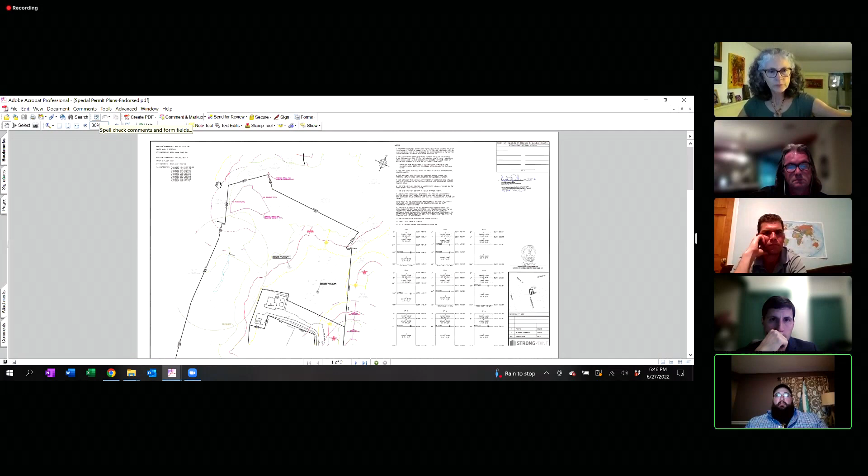Ta-da. So just as a refresher, let me start with this. This is the plan that you endorsed originally, based on the special permit back in September 2021. Here is the existing house at 81 Summer Street. This hatched gray driveway is the existing drive. What we had proposed at the time was to break that driveway here and use it to access these three house lots up in this location. To get access to the existing house, we were going to bring a driveway up through this area.

So what the board encouraged us to do, and what we did do, was go for a variance to eliminate this driveway and allow these three new houses and this fourth existing house to all be accessed off this driveway.

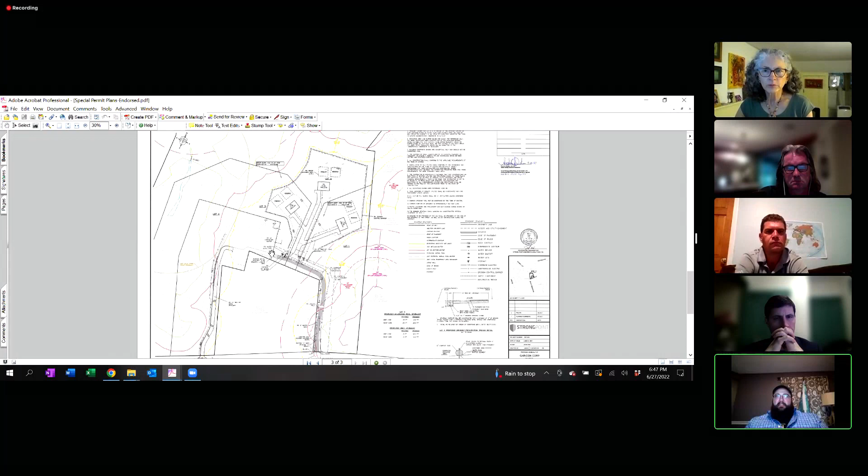So I'll bring that plan up now. That is what ended up being revision 3 to the plans. I'll go to that same sheet for comparison, and what you'll see is the same exact lot configuration. We've gotten rid of the break in the driveway here, and eliminated any semblance of a driveway coming in off the west to access lot 4.

Eric, hang on, let me pause you there for a second. Stephanie, seeing this plan, assuming it has everything we needed, we decided this would just be administrative, that you would just grab it. Do we need to take a vote on this, or not, as I recall?

Any issues? Okay, so motion to approve the final plan, or the post— I'm sorry, it's been a stressful day. You guys have to make the motion, forgive me. Okay, motion to approve the updated plan, reflecting the variance that was granted. That's seconded.

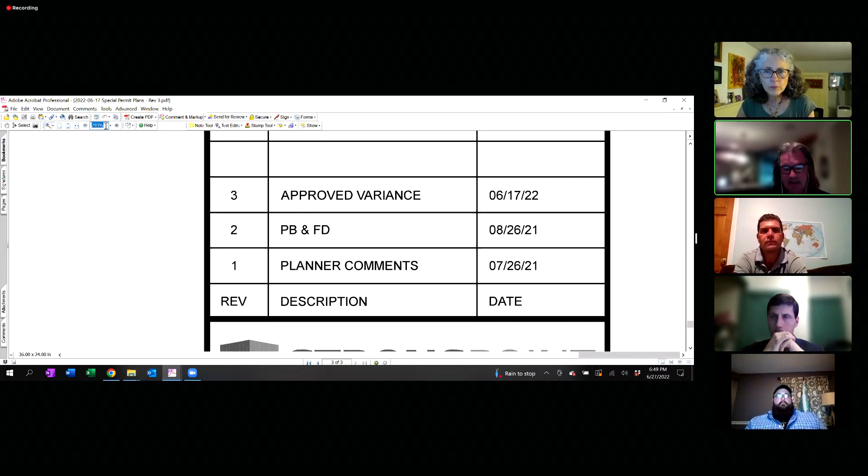Any further discussion? I'm sharing a screen so I can't save it. No chat, nothing. Okay, hearing and seeing none, all those in favor. Shane, aye. Stetson, aye. Balsaric, aye. Great, all right, thank you.

Okay, Eric, so now we haven't seen you for months. We've approved your plan, you got us everything you needed. Now your client wants to change things. Why don't you tell us? Now he wants to change things a little bit, yes.

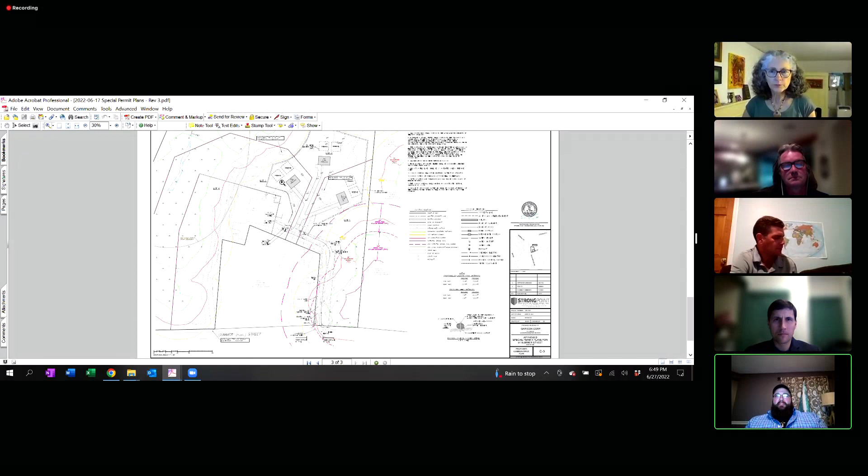So just looking at this plan we just had up, as you can see, these house boxes are a little generic, just a square house box, somewhat of a placeholder, and obviously subject to change once he has a final buyer. Same thing with septic locations. So what we've done since then, a couple of things.

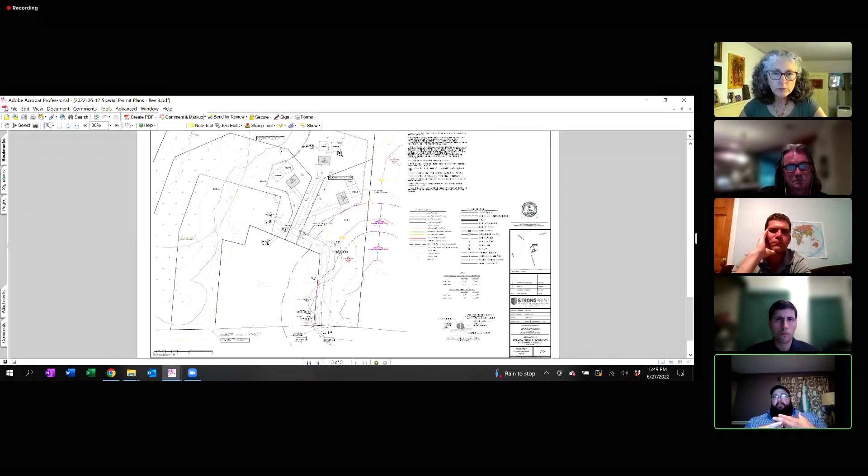He does have a buyer for these lots. We've determined exactly what they want to go with for the house footprints on these lots. We've gone out and redone some test pits, cleaned up our septic plans, and submitted those to the Board of Health as well. So that brings us to this plan.

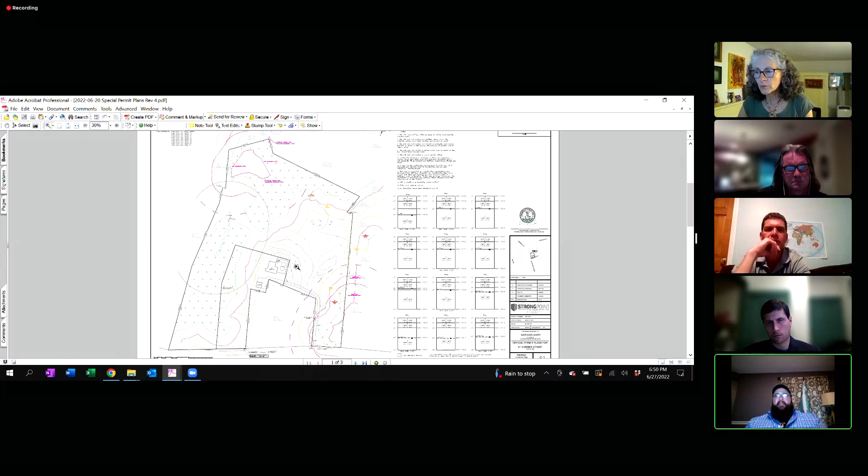This plan is the same plan set we just went through. We've adapted the existing conditions plan to reflect our new test pit locations, here and here. This will eventually, should the board accept these changes, become the basis for an A&R plan. If we zoom in, what's shown as the former lot line on this plan is actually the way the lots are laid out now, with this chamfer at the corners. We're simply revising the lot lines to extend these to square off lot 1 and lot 3 a little bit more.

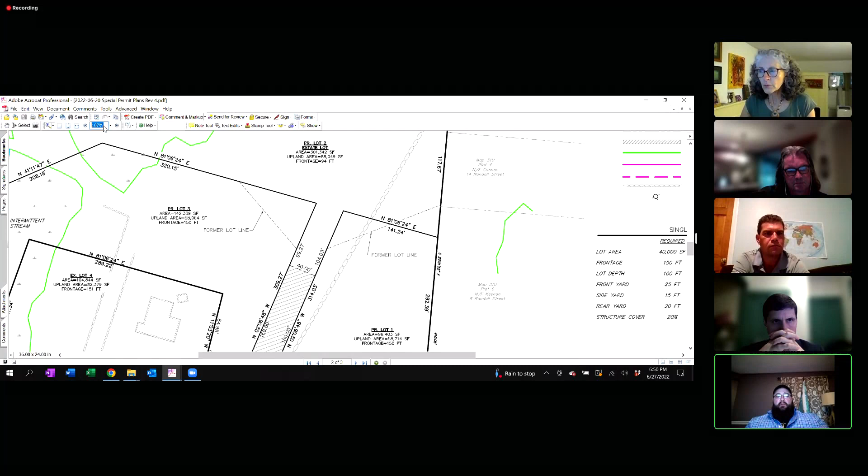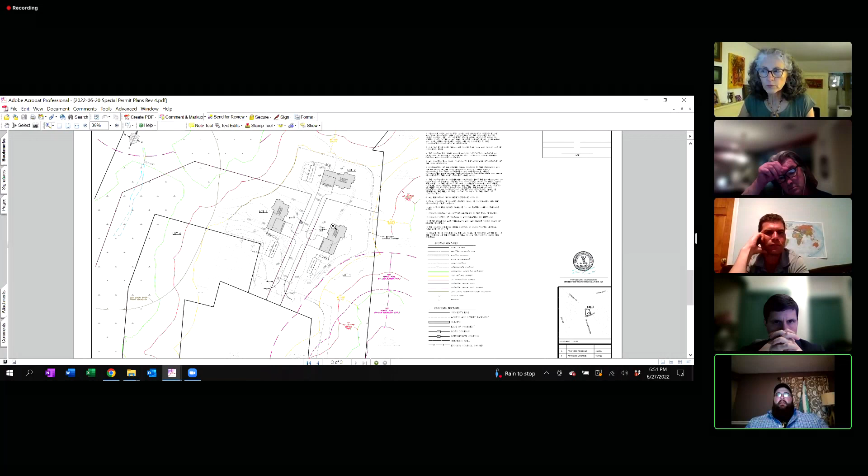Everything is still compliant with zoning. So provided we're successful with this modification tonight, we would presumably be at your next meeting with an A&R plan just to make that change. And with regard to the layout, here is the revised layout the client is seeking. Still 3 houses, still the same general configuration, but the house footprints are more advanced at this point. The septic designs are more advanced and have been submitted to the Board of Health. With these 2 lots, 1 and 3, before they were angled more toward the mouth of the right of the driveway, they face each other now.

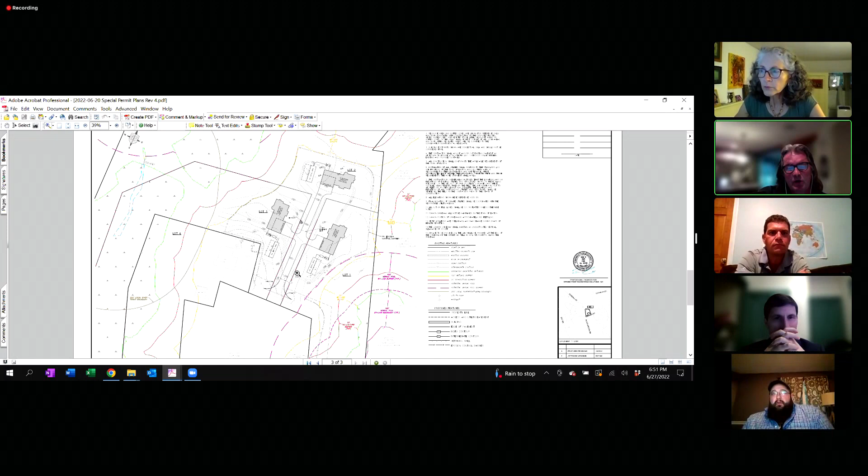Okay, but I know that's not the whole story. Do you want to talk about what else is different in this plan, or do you want me to? In terms of the clearing is what I'm talking about. Well, let's touch base on that. Can we go side by side with the original plan, the approved plan? Do you have that capability? Absolutely can, give me just a second to figure out how to do that.

And we will make it happen. So here's the approved plan.

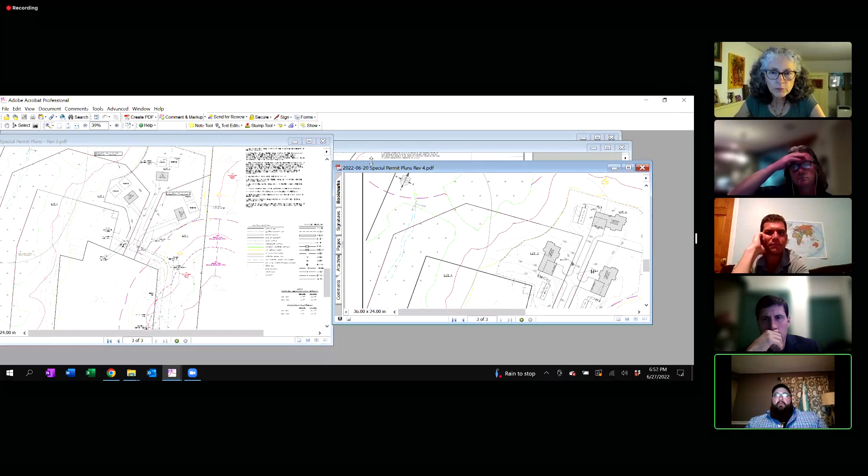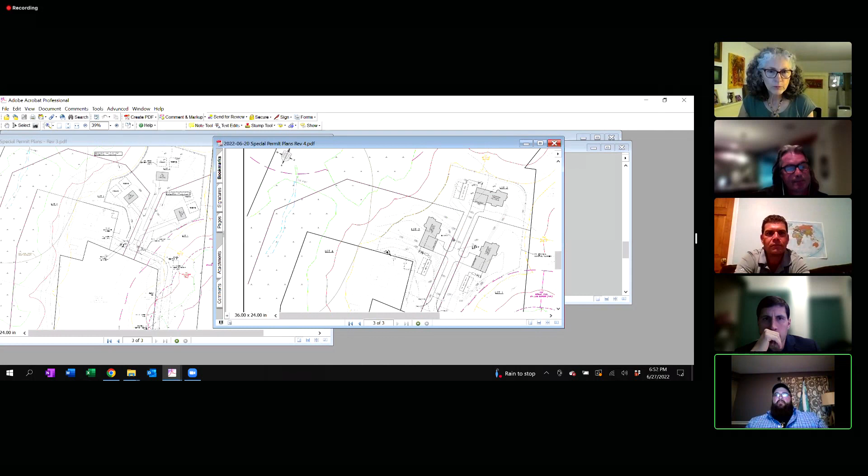Okay, so let's talk about the clearing out there while we do this. The client got to work out there to start clearing the lots to make way for all of this. And the approved limit of clearing is right at the 100-foot buffer zone on every iteration of the plans that we produced. You can see it here.

You can see the EC barrier that comes up through here, right at the 100-foot buffer zone. For whatever reason, and I can't tell you exactly why it happened or what happened, but the tree clearers got a little carried away and cleared in some places into the 100-foot buffer zone, right up to the 50-foot buffer zone. We got a call from conservation from Jen Carlino.

We put the brakes on everything, ran out there to figure out what was going on. I think we got our survey crew out there within the next 24 hours to survey the damage that had been done and determine, yeah, they had in fact cleared into the buffer zone.

We have since been working with the Conservation Commission very closely. We have completed a buffer zone restoration through the area that was cleared and wasn't supposed to be. We are in the process of installing a post and rail fence along the extents of that buffer zone restoration to stop any future homeowners from encroaching further.

And at the meeting tonight, I actually have a conservation meeting on this when we're done here. We are proposing to provide a bond for the restoration work to make sure that any plants that die are able to be replanted and things like that. That to ensure that the site will be monitored as it's supposed to be, et cetera, et cetera, et cetera.

So I think through an arduous, long process, we are getting to a point where the Conservation Commission is, I don't want to say satisfied, but I want to say that we're at least wrapping this up with them the best that we can. Okay, so I just want to jump in for a second.

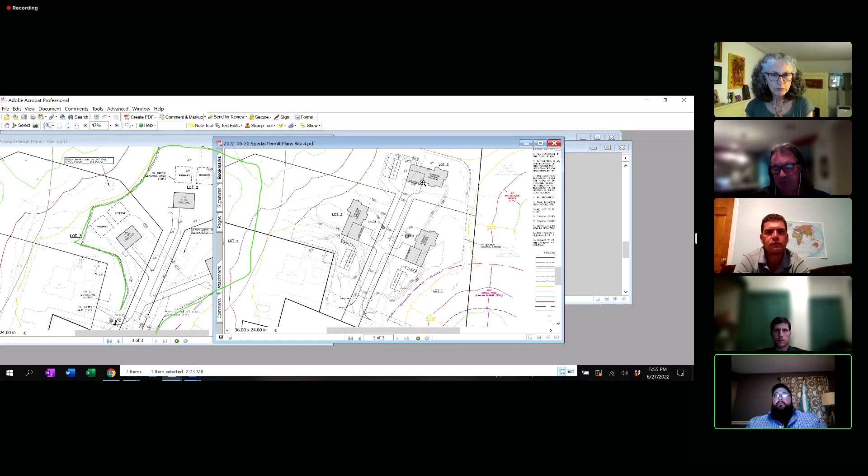So here. I just wanted to bring to the board's attention, you might say, hey, because, okay, when we approve these things, they're all different, but I go back, I think about the bylaws, and this is a special permit. So what was special about this?

Well, okay, in return for this, not having to build the whole road and everything, we're trying to maintain some of Easton's rural character. So we were leaving trees between the existing, if you look to the plan to the left with Eric marked it in green, there's trees between the existing house.

And to the right, and you may say, hey, that's fine, no big deal, none of our business, we're not back there. If it had come in the way it is, maybe we still would have approved it. Maybe we would have asked for a little landscaping. Hey, could you put some trees in here to give some buffer? Because I've heard a few of us say, oh, I hate to have houses right in someone's backyard. Well, mature trees, like there was a nice, mature forest there, can take some of that away.

So I just wanted to bring that up and see if we, as a board, feel that anything needs to be changed from what they've done, or you're okay with what they're proposing. At the meetings, the woman who lived right in front there came to almost every meeting, and she wasn't even against the project. It was more that she was hoping to maintain some privacy.

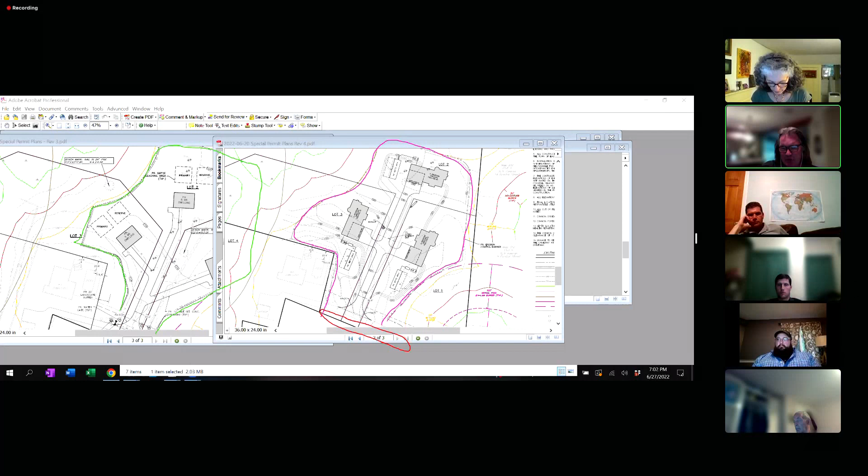Okay, and I see some hands in the air too. We have to check, but I'd rather see you get wrapped up with Concom first anyways, right? And then you add some of the plantings like we talked about in front, and I'd like to see that fence in the plan since it's there. That makes sense, I think, to put that 6-foot fence you talked about. And then see what you can do with footprint locations and mirroring.

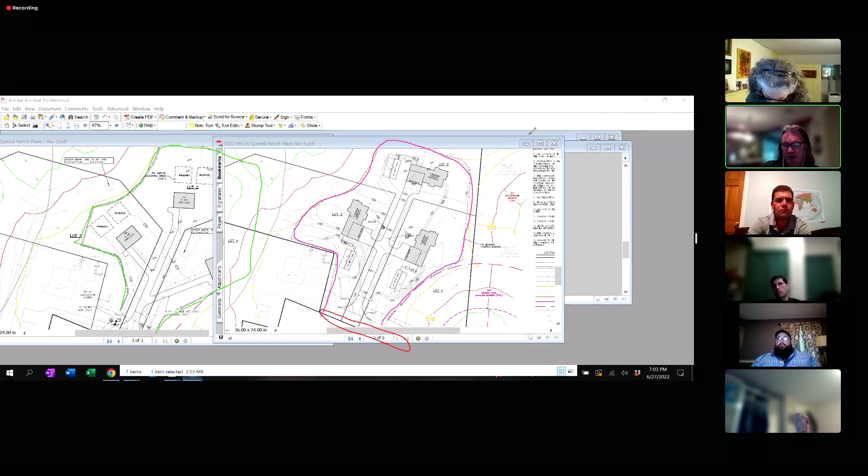Okay, so we don't really need to take a vote on this, right? This is just kind of a discussion. So Eric, you're going to revise this and put on whatever you have with Concom, and then come on back. Are we formally continuing? Can I get on the next meeting, or how do we do that? I think just make it an agenda item, right? Because this would be a modification of a special permit, right? I guess. So okay, we won't vote on it tonight, this is just a discussion tonight. Sure, and then we'll just put them on the next agenda. Correct? Yep, okay, yep, great.

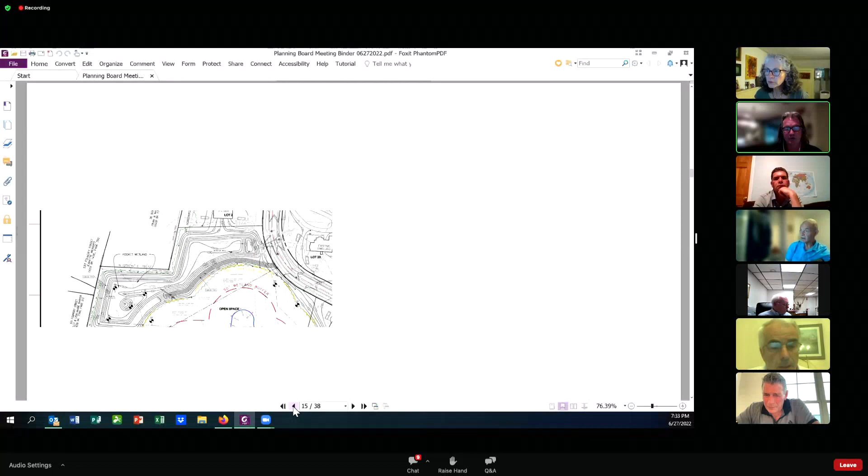Right here, right at DMH3, right at the entrance. Once you do lot numbers it might be easier. Yeah, that would be easier for me. Right between lots 6 and 7, at the beginning of the access to the infiltration basin. Okay, right around that area, yeah, is where the roadway had to come up. What was it, Walter, 1.2 feet?

So one thing I would bring up - I'd get a lot of this from Stephanie when she was dealing with the peer reviewers and the development team - part of the reason this took so long to get back was they wanted to make sure they could maintain the road at the lower elevation, to fit with keeping the existing trees and all of that.

That's a good point. So is it the whole road that's up? It's not a big deal, but it's up a foot or a foot and a half for the entire length of the road, more or less, except maybe towards the end - or just those two sections. It's just that section, for some length in both directions.

As you get nearer to the top of the road, we'll actually cast water towards the cul-de-sac. That'll be the crest of the road. But it all drains back down to the access easement and into the infiltration basin. We have a very nice transition throughout the entire roadway, so there is no appreciable rise or hump that would be noticeable enough to be a distraction.

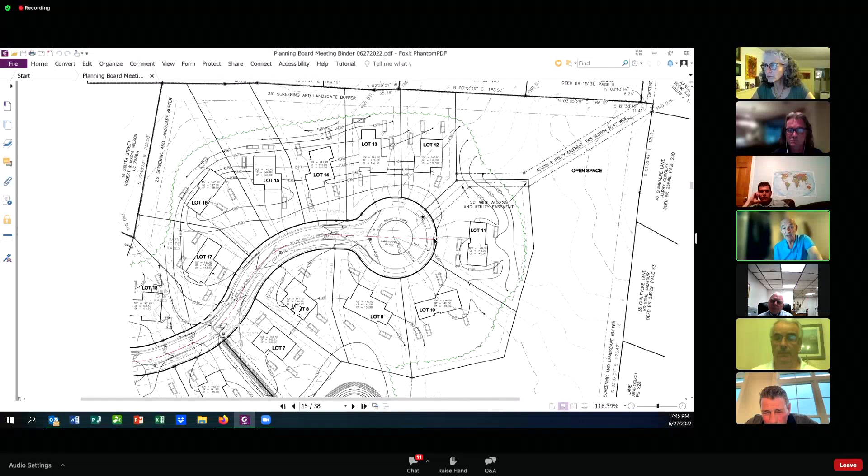I would like to know what ideas they have for public access to the open space. Is this something you haven't thought about? What did you want to know about access to the public space? It's been discussed many times that the open space, the neighbors and everyone else wanted to be able to access it, and that was mentioned by Greg at the beginning, but is there now anything concrete about what ideas you have to improve that existing path, the easement to the water?

I could try to answer that for you, Amas. Greg brought up a good point about maybe describing the access better from lot 11 to the open space. That is one of three points where someone can access the open space. The second one, if Stephanie could go down the screen, is the beginning of the access easement for the infiltration basin between lot 6 and 7.

That entire access easement is also access to the open space, albeit you have to walk along the infiltration basin, but it is continuous and a second point of access. And on the sheet Stephanie's bringing up now, right after lot 2 as you come into the subdivision, the entire bend in the road is actually access to open space, including the remaining woodlands where we're staying 100 feet away from the BVW, and throughout the entire constructed wetlands. This also connects continuously with all the open space that wraps around the project, so we have 3 points of open space available to the public for access.

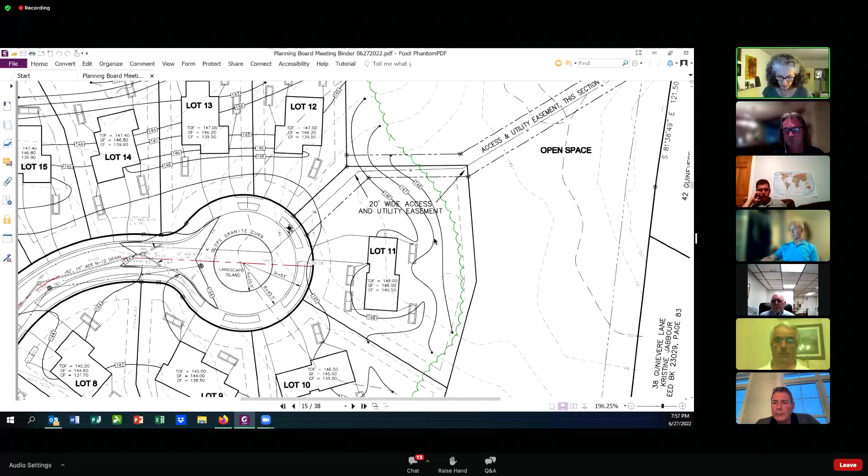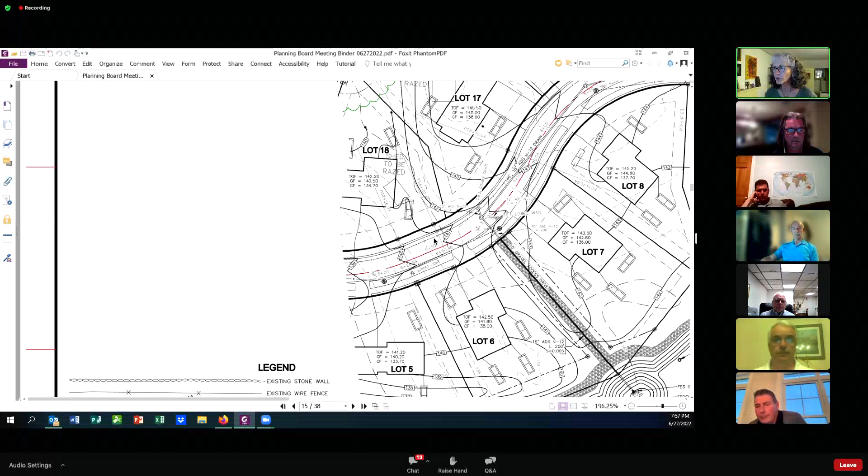Absolutely. I'm going to move the screen a little bit - we have some language that might make sense there, so I'll draft that when we get there. It's very similar to a house being preserved as part of the Union Ledge project, a 40B that was just recently approved by the Board of Appeals.

So everywhere where the property abuts existing residential, they have shown the 25-foot buffer and explained what's going on with the constructed wetland. But in this area, there is not a 25-foot buffer, and I'm not sure why that is or why that one couldn't be.

It's an existing dwelling, Stephanie. The driveway is already installed, the house is there, the grass is there, it's an existing dwelling. So should this, what's there as a buffer, be shown as a retained buffer?

So you do show a tree line here. There is a tree line there, I don't have a problem with that. There's a lot of heavy trees there. So that would be my suggestion, that maybe that be shown as a lesser buffer because it's pre-existing, but that buffer be retained.

You do notice though, on the plan, it says barn to be razed. And I do know that the commission said that I have to address that and go before them, but I don't know if you've seen that barn, it's falling right now, it's falling over, it's falling in. We saw that. Okay, yeah, I'm talking about the dwelling.

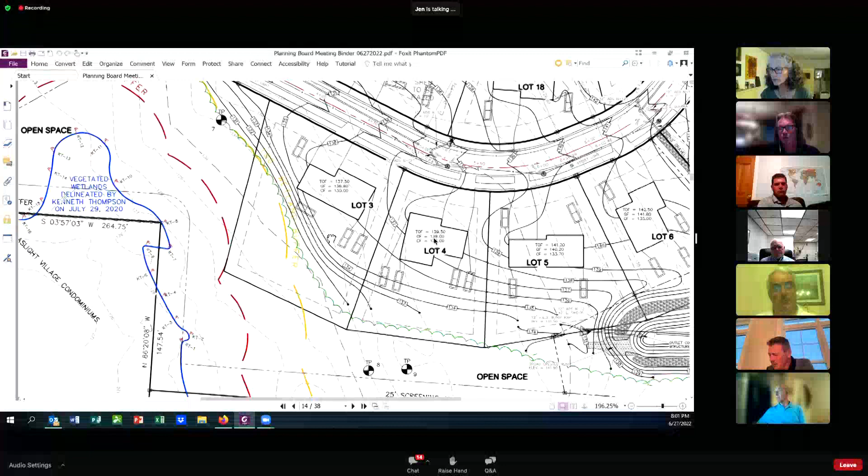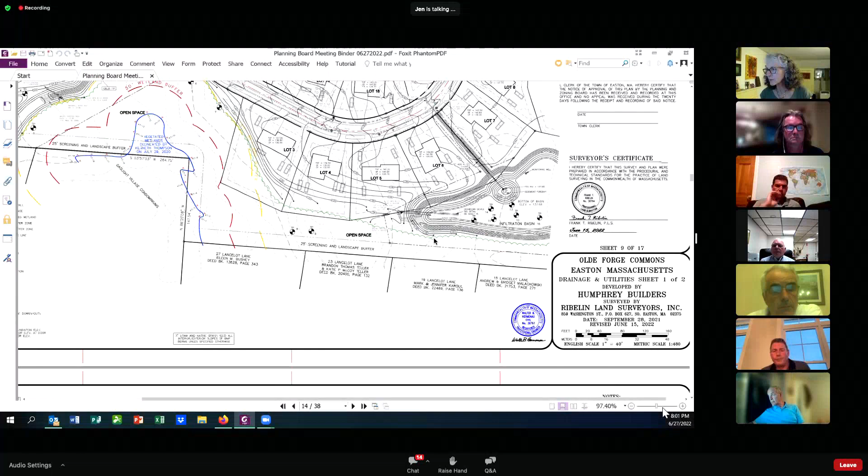I'm not sure where it comes into the lot. I did have my land recently surveyed, and the surveyor had looked at my plan and said that you guys were planning on putting a basin directly behind where my home is. I kind of wanted to know the schematics of that, how it will affect my property. I wanted to know, will the structure be noisy? Will it attract mosquitoes? Because I understand there's another kind of water basin. And I wanted to know how that will be maintained and who will be the person in charge of maintaining that.

Okay, great question. So let's ask the engineering team to answer those questions. And so you guys know 19 Lancelot, so she's talking about the Eastern infiltration basin, right here.

All right, I can field those questions. Pardon me if I don't remember all of them, I think there was maybe 5 or 6 involved. What does it look like? How does it function? Does it make noise? How does it affect your property?

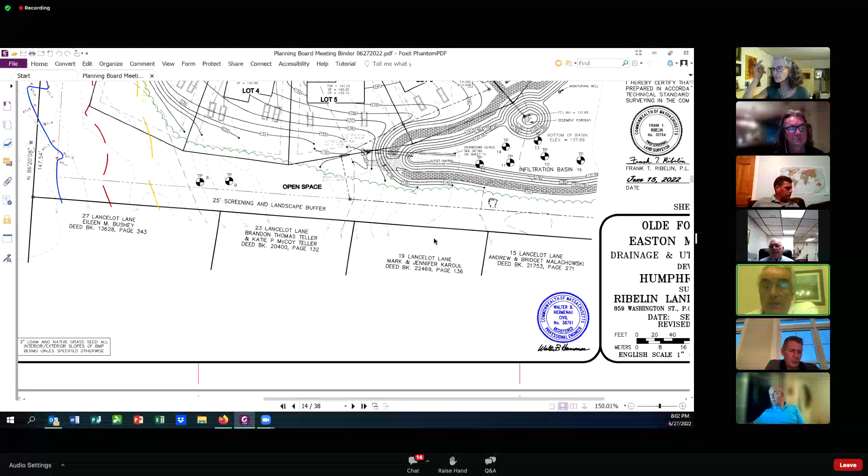Well, for starters, it will not affect any of these lots, it will not affect any abutting lots whatsoever. This is an infiltration basin that is designed to temporarily retain stormwater running off of the subdivision, and it will infiltrate the water in less than 72 hours.

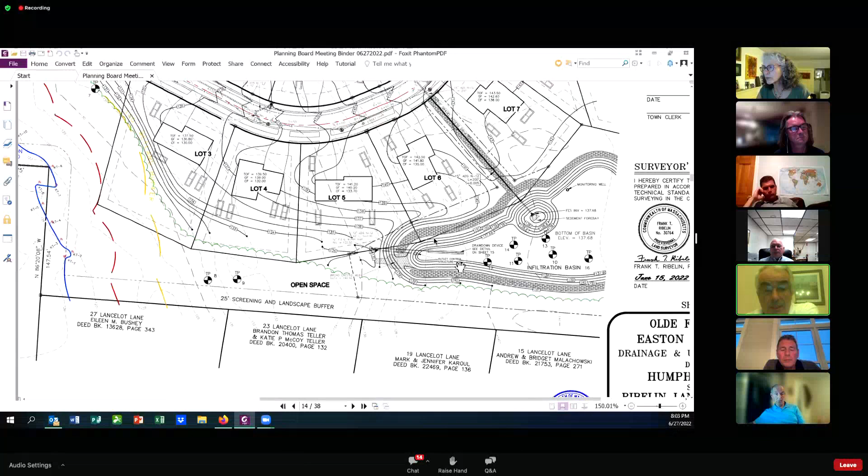If we have too much water, we have an outlet control structure designed to release some of the water following the natural path that it's taking under existing conditions, and it will trickle down through the woods, through the vegetated area, and head to the wetlands.

This is an earthen berm structure with a grass bottom. There will be no noise once completed. It's very quiet, and there's substantial buffer between the basin and the abutting properties, so you may be hard pressed to even see it.

Essentially, it's going to be a rather big hole in the ground. If you look on the northerly side, it's almost at existing grade—actually it is at existing grade. On the southerly side, we have to build it up a little bit because the bottom of the basin has to be just about level. But it is a shallow basin.

It is 4 feet above the water table, and again, it's going to infiltrate a tremendous amount of water. I've done calculations many times over, peer reviewed, that this basin is only as large as required to retain sufficient water, so we don't send it off too fast and not too much. After development, conditions will have less water coming down that natural pathway than there currently is right now. Did I answer all the questions?

I wanted to know if that basin will attract mosquitoes, seeing how Easton has had several years where we had EEE, and I'm concerned about whether that will attract them and whether the BETA people had approved it. I heard you guys talking about independent reviewers, so I wanted to make sure it was the BETA organization that approved that plan. We also have bad water quality in the area, so I want to know if there's any risk of this affecting our water quality.

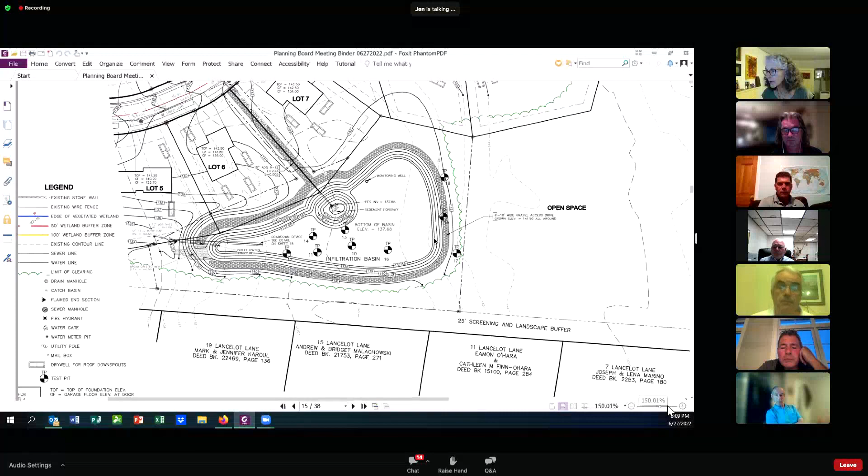If I could, they're shown on the screen - the test pits are all these circles. Yes, I'm sorry, it's kind of small for me, I'm literally holding it up to my face. Oh, that's so much better, thank you. It might be like 100 feet away from your yard or so. Oh, that makes much more sense, thank you for doing that, now I can see it.

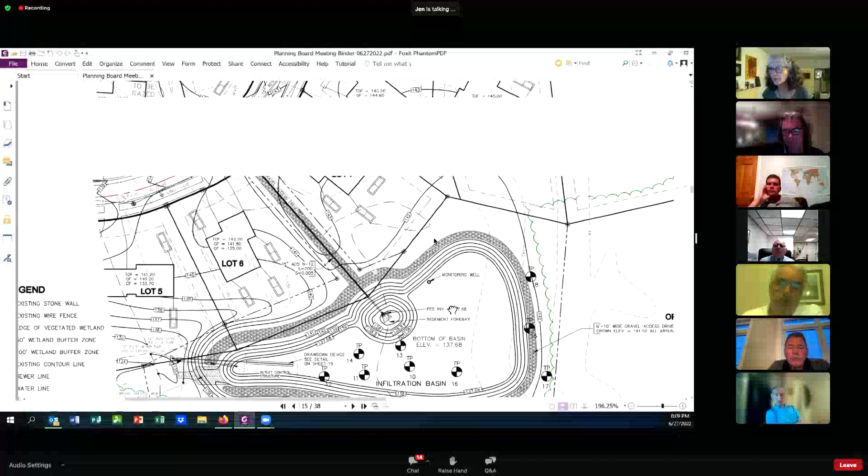There was talk of the easement - I didn't know what you guys were talking about. Does that run behind our property? No, that easement is at the cul-de-sac on the northernmost part of the property, for a water line loop and for access to the open space. Okay, thank you for answering my questions. Sure, I appreciate the time. Thank you, appreciate your input.

Now that's the only Q&A. I'm going to jump over to the chat. I know not everything here is a question, I'm just going to take it from the top down.

Okay, that's another project, Jen, we just spoke to. All right, so 541 Foundry... to host and panel. Oh, never mind, that's not a question to us. Forgive me guys, doing this live as we go here.

Fran Masters, I am the abutter at 36 South Street. I have the same concerns - I'm worried about flooding, mosquitoes, and wildlife. Can I be assured that my property will not be flooded, and what recourse do I have if it is?

So why don't we - I see a number of questions that have to do with flooding and where the water's going - give a quick description of the goal of stormwater management. We just heard about Beta, which is the peer review here, making sure the stormwater management meets all the state and local requirements. So in layman's terms, give a quick synopsis of what has to happen to all the water, then let's look at 36 South Street.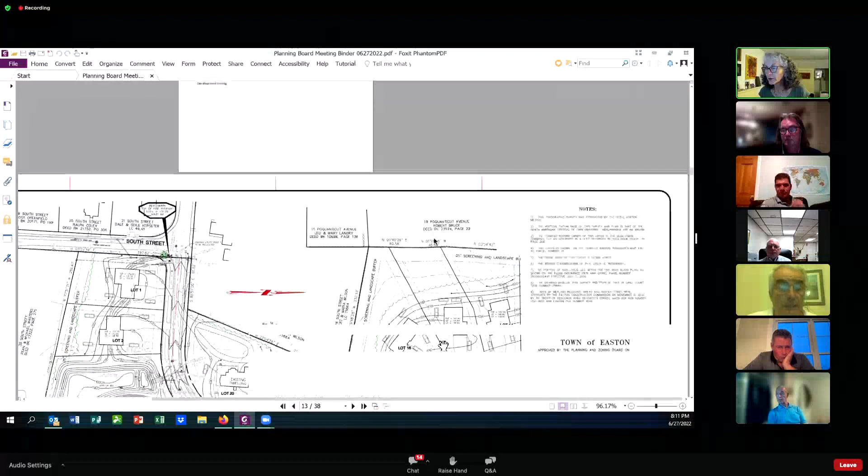That's the house just north of the southernmost. Sheet 7, please, Stephanie. But I don't know which page number sheet 7 is, hold on a second. Just keep going up towards the beginning. You tell me when I get there. Yep, go in the other direction, head to the top of the screen. There you go.

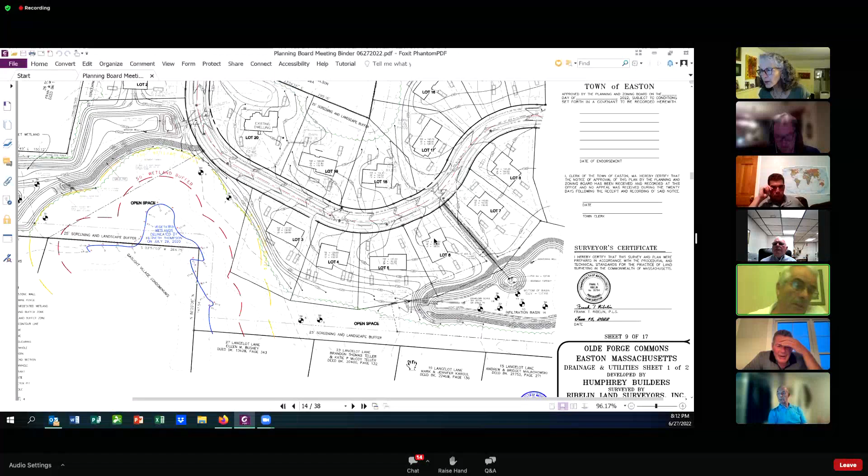We're trying to show the neighbor's location - was it 36 South Street, Mr. Strange? Okay yeah, sorry, I was muted. Yeah, 36, stop right there - south of that, it's that lot on the left, the lot that's all white. That's here, where the question came from. Okay, sorry.

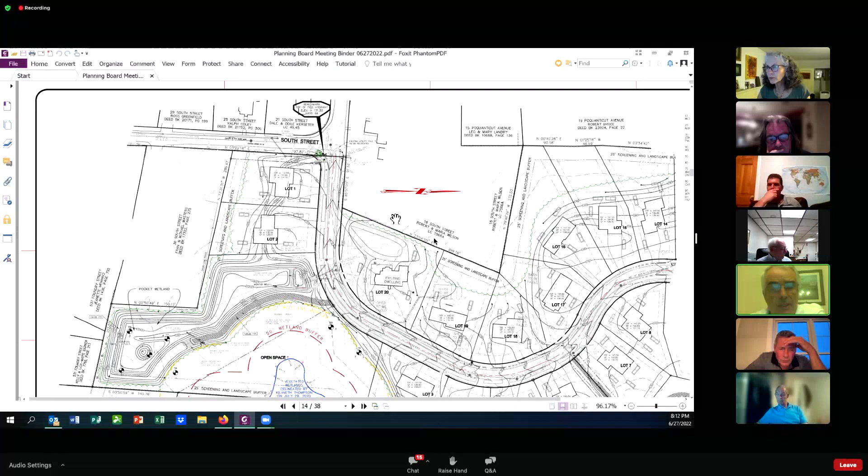I'll try to explain in layman's terms. We look at a piece of property and understand which way the water's flowing to begin with, prior to any design work on the project, and we establish a design point. Stephanie, is it possible to go up the sheet on the plan set, to an earlier sheet that shows the flow pathways for this particular location? I might not have the sheet you're talking about. Oh okay, that's okay, we did not include the watershed plans.

If we could just go back to that sheet - there you go, right there. So we establish the watersheds, we break down where the water's going across a parcel. Sometimes there are multiple areas heading off in different directions, and we call those design points. One of them happens to be the low spot right down here where lot 1 on South Street and the neighbor meet - that's called design point number 2. We analyzed all the water heading that way for the 10, 25, and 100-year storm events, which are the required events. Then we put together our design, and in our design we have to take into consideration that we shed less water in the direction of that design point.

For example, the worst storm event, the 100-year storm, is roughly 7 cubic feet per second that might be leaving this corner. And that's a tremendous amount of rain, over 7 inches in 24 hours.

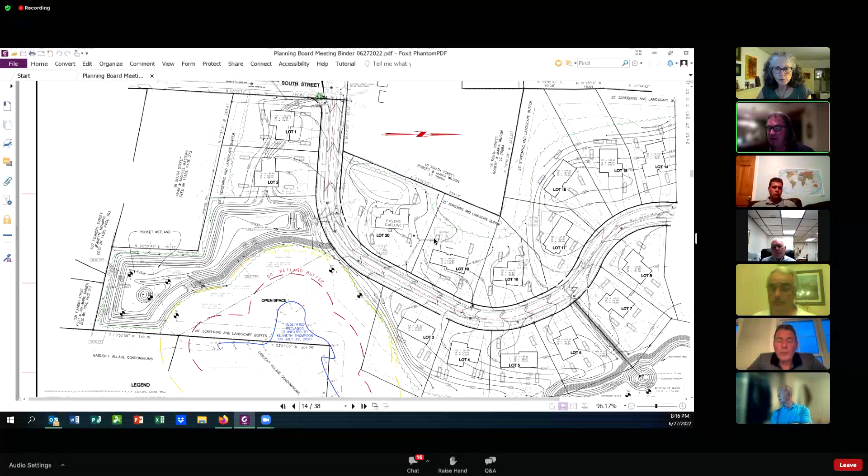Okay, fantastic. All right, I want to jump ahead. I'm sure we'll be getting more drainage questions on another night or tonight. So next up from Rob Wilson: does the board agree that there is an increased hazard exiting the driveway at 16 South Street? And what are the options to address it?

So Stephanie, if you could keep that same sheet up. Since this is addressed to the board, I'll go first, being the chair. And I'd say a couple things.

When we looked at this, I'd spoken with Mr. Wilson 2 years ago, I think 4 conversations, and talked about it at the time. In fact this is in the minutes from the preliminary hearing. He said many people turn from Poquanticut onto the street and used to go into the estate, maybe thinking it was 106. So there was talk of putting a 'not an outlet' sign or something. I understand this existing street is sort of an elbow. Pretty much the only people that go on there are for the 6 or 8 houses on the street, forgive me, I don't have the exact number.

So adding 19 additional homes, there's increased traffic. So I guess in theory, 19 additional homes offers more potential for accidents. I wouldn't call it hazardous, but I don't live there. I wouldn't choose to assume.

What I've said before, at the last meeting, is that I would recommend - as I recall Mr. Wilson's issue was, okay, if he's backing out and there's cars coming, why don't we put a stop sign at the exit to the subdivision, and possibly, if the traffic committee in town felt it was needed, put one on South Street. And we can't put that on Mr. Humphrey because that's town land.

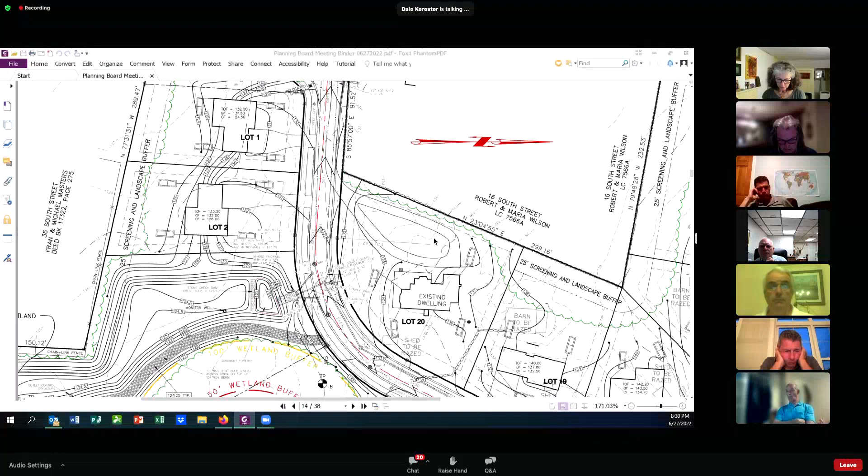On the public safety and traffic issue, I would disagree respectfully, Greg, with something you just said about the layout not being unusually hazardous. Keeping in mind what Stephanie already has here, Stephanie, if you wouldn't mind, scroll up so we see the intersection on that plan. You're on page 14 of 38. And if you could just roll that down.

What is extraordinarily unique about this is that traffic traveling from Poquanticut on South Street, heading east towards the new development, that road will look like an extension of South Street. So I am very much in favor of installing stop signs, because otherwise folks traveling from Poquanticut into the development, whether new residents or delivery trucks, it looks like you're going to be traveling straight. However, folks traveling on South Street in a northerly direction from 106 curve around the corner, so folks traveling east on South Street will be crossing the lane of traffic on the other side, perhaps without realizing it.

So what I would ask the board to do, and I am particularly pleased there's been acknowledgement of the need for additional stop signs. I understand that's not something Mr. Humphrey has control over, but I would hope the applicant, as advocate on behalf of all the new folks who will be living there, the existing residents, and the board, are all on board. This makes a lot of sense.

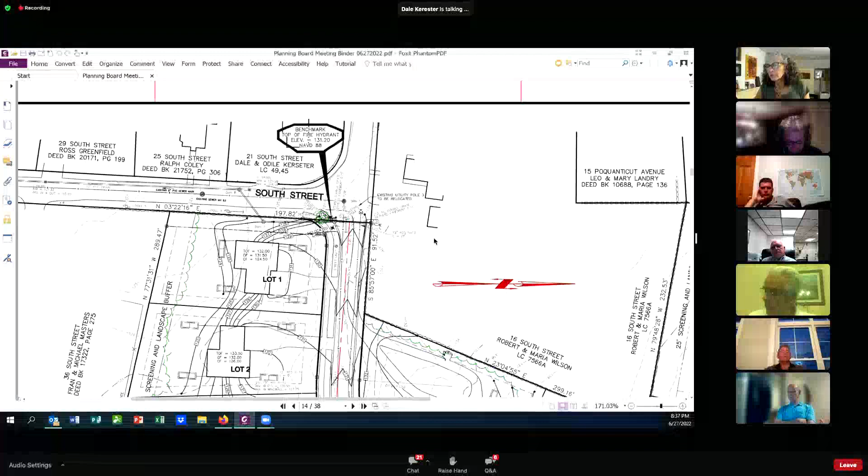If I can summarize on public access—if I heard correctly, the board seems to be in favor, at the northern end by the cul-de-sac, of moving the lot line over by, say, 10 feet so there's no issue of people feeling like they're walking across somebody's lawn. I understand from Mr. Humphrey that this would be maintained as a path, perhaps with a tree line, or as Stephanie suggested, some type of split rail fencing, which would be beneficial.

What was also unclear to me is I'd like to make sure that the public access easement for the other access to the property confirms in the language itself that it's actually access for the public as well. I think that's an important point, as Greg pointed out. We've said every time that this is going to be there, just like every other open space that we do.

That will totally be public access.

The third issue, and I'll conclude there, is that I had made reference in two of my earlier letters about the request for the 2 additional units. I don't frankly care whether it's 18 or 20, doesn't make a difference to me. It's going to have a huge impact on this neighborhood regardless. I would suggest there are no other projects in town where you have as many homes letting out into what's the quietest street, but it is what it is. I do recommend that town counsel be consulted to see whether the board has the authority to grant the 2 additional units. As I read the zoning bylaws, given that donation was made for a prior project expressly as a condition, the board may not have that authority.

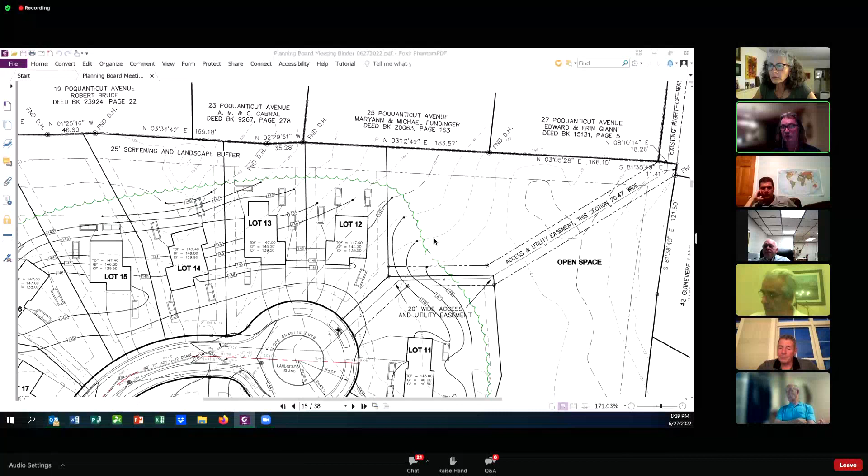Thank you, Dale. And I would add, I disagree unless some facts have come to light, but I confirmed with town counsel, with the town planner at the time, and with the land use agent, the conservation agent, that donation was not tied to any prior project.

Anyways, I think this is a good place to stop. We've given it over 2 hours, we've got some great feedback. And like I said at that first public hearing, I said it would be 1 to 3 more meetings. That was back at the time, and yeah, we've got a couple more meetings here. There's some stuff that came up, we'll get on the plans, some questions. We'll talk to, I'll debrief with Stephanie, and we'll see about the South Street and traffic committee for the additional signs, and touch base to make sure we're all on the same page with the access, how we're getting there, and the easement and all that.

Board members or Stephanie, any last thoughts? Anything we haven't touched on? So, Bill, to you and your team, do you want to go out?

We'll continue to the next meeting, which is 2 weeks out. Is that the next meeting? Hold on, here's my agenda. I think it's July 11th. Correct, July 11th. That's what we'd like to do, please. 2 weeks out. All right, can I get a motion to continue to our next meeting on the 11th?

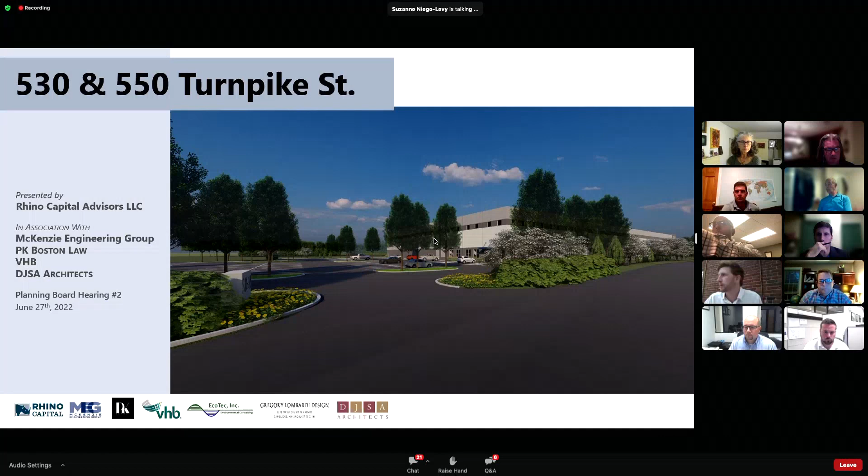So introductions, Rob already went through. Agenda again, reintroducing this project, we're just going to keep everything high level and want to get everybody up to speed as to the project.

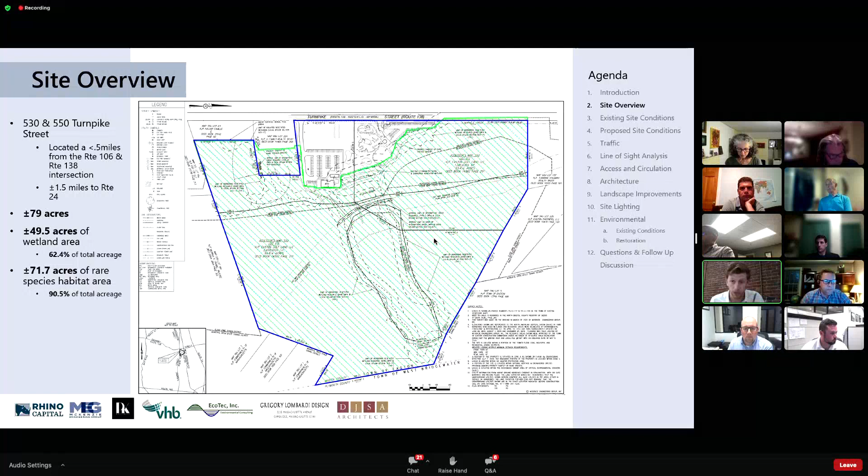Site overview here. The project is located at 530 and 550 Turnpike Street, just a half-mile south of the intersection of Route 106 and 138, and about a mile and a half to the Route 24 interchange. Between the two parcels of land, it's about 79 total acres, 49 and a half of which is represented as wetland area, roughly 62% of the total acreage. 71, or just shy of 72 acres, is a rare species habitat area. That area is highlighted, hatched in green, and the property boundary is hatched in blue. Our proposed project will take place entirely outside of that natural heritage boundary. So our project limits are roughly just less than 10% of the total acreage of the property.

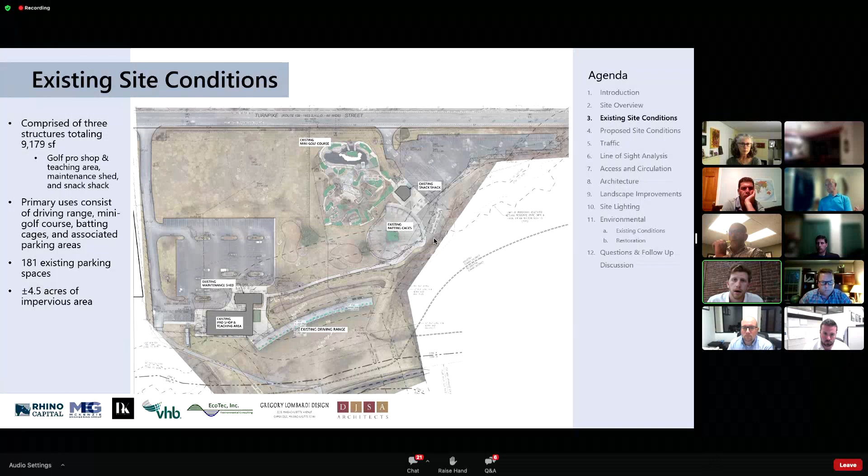Existing conditions: the property is currently occupied by a driving range, a pro shop and teaching facility, a maintenance shed, a snack shack, an existing batting cage, and an existing mini golf course. There are also 181 existing parking spaces that support this use, and roughly 4.5 acres of total impervious area.

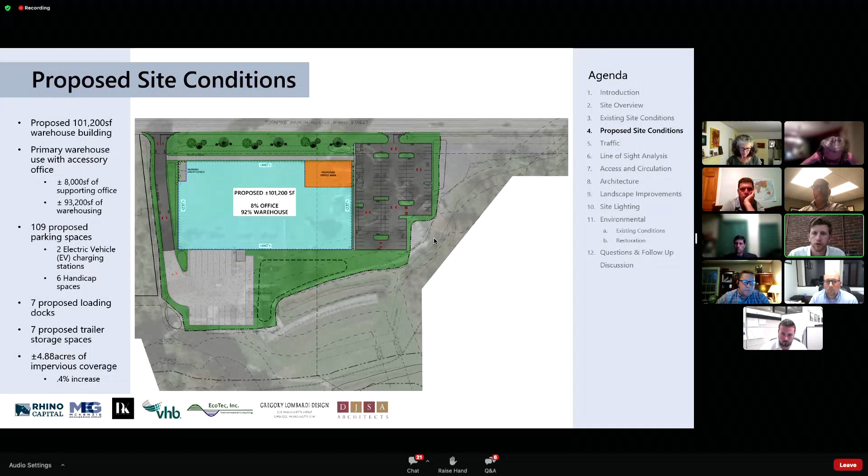We are proposing a 101,200 square foot warehouse building, broken down into roughly 8,000 square feet of office space and 93,200 square feet of warehousing. We're proposing 109 parking spaces, 2 of which will be electric vehicle charging stations, 6 of which will be handicap parking spaces. We're proposing seven loading docks located at the rear of the property, away from Turnpike Street, and 7 proposed trailer storage spaces. All in, it's roughly 4.88 acres of impervious coverage, which represents just shy of a 0.5% increase in total impervious coverage.

I will now turn it over to Matt Keeley from VHB, our traffic engineer, to discuss some of the revisions we made to our traffic impact assessment as a result of comments received at our last planning board hearing.

Thank you, John. Just to quickly recap a couple of points from the last hearing and provide an update on some recent submissions: we took a look at the trip generation, and on its own it's not a large generator of traffic. We also conducted traffic counts at the site when the driving range was open, and we're expecting a very minor increase in the morning of about 35 vehicles, and actually a decrease in vehicle trips during the weekday evening peak hour.

So we're not expecting this to be a big traffic generator, but we did want to follow up with some mitigation measures that Rhino wanted to implement as part of the project. The first being a transportation demand management program, geared towards reducing the number of vehicle trips to and from the site on a daily basis. You can achieve that through ride matching, carpooling, providing incentives to carpool and van pool, providing information for alternate modes of transportation, and things like that. John already mentioned the fuel efficient vehicle spaces being put on the site. So those types of things will be implemented in an effort to minimize the amount of traffic traveling to and from the site.

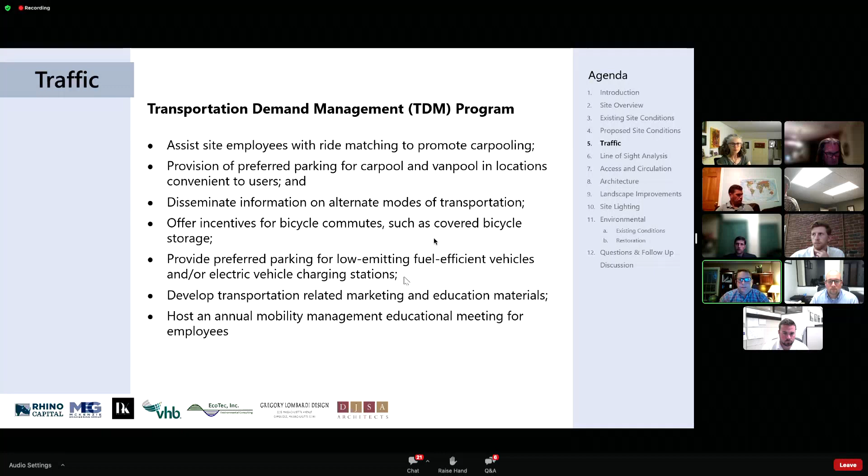For a traffic monitoring program, this is something that would typically be required by MassDOT for larger projects. Most likely would not be required for something of this size, but Rhino wanted to offer this anyway. A traffic monitoring program counts vehicle trips traveling to and from the site on a daily basis, as well as a peak hour basis after it's occupied, basically as a check of our trip generation projections, and reports that information back to the town and to MassDOT. So this is a safety measure that keeps our estimates in check, and provides that information to the town.

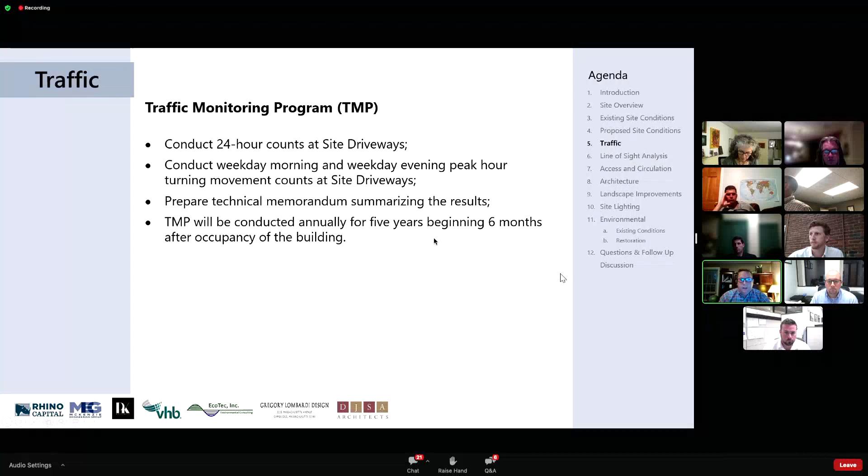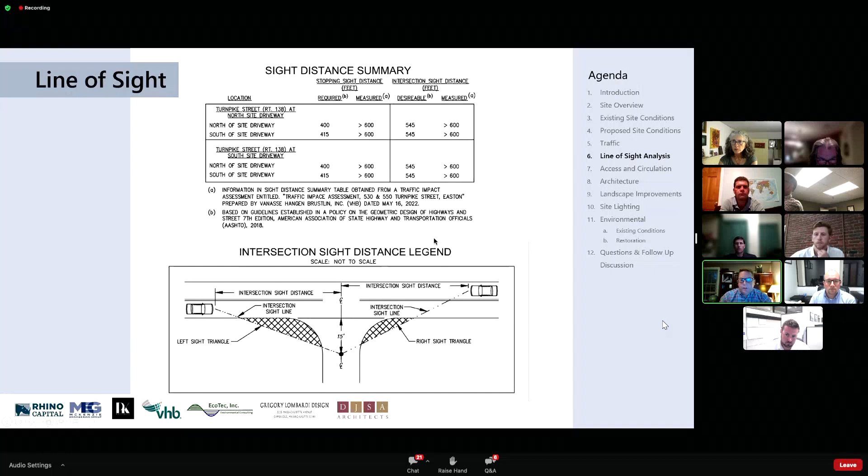As I mentioned last time, with a project that's not really a big traffic generator, we try to turn our focus to safety. We provided a crash history, and there's not a lengthy crash history along the site frontage here. We wanted to measure the sight lines as well at each of the site driveways. The chart you see here was also provided in our traffic study, and it shows that for intersection sight distance and stopping sight distance at both driveways, we far exceed the requirements. One of the follow-ups from last meeting was someone who wanted to see how that plots out on the plan.

In the next slide, I think Austin can take that one over.

Thanks, Matt. Austin Chartier with McKenzie Engineering Group for the record. I can just quickly add on to what Matt said here. The reason for the excess in sight distance is simply that the road's so straight out here, and you have plenty of sight lines from both entrances to the site. Both of these entrance locations exist today, and as Matt was saying, it's not a high crash location. We may even see a decrease in some of the trips in the afternoon peak hours.

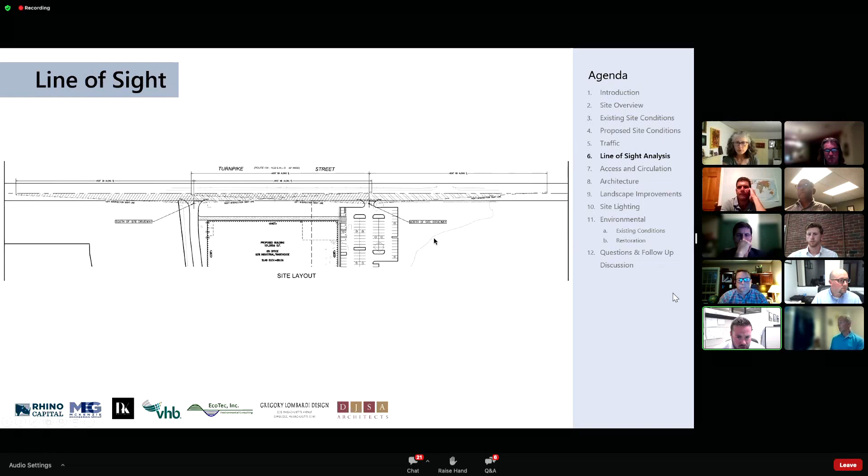So we did look into diving into a little bit of the safety proposed on the site. And actually, if we go to the next slide, John.

For a warehouse of this size and use, typically we're seeing WB50 trucks. We had modeled the WB67 on the last slide, which may have been a bit of an over-exaggeration of what it might look like out here. So we just wanted to show realistically the truck sizes that'll be using this, and you can see that the turning movements are easily accomplished out here. We're providing a 35-foot radius, which is roughly similar to what's out there today. MassDOT typically doesn't want to see anything over 40 feet, but we'll go through that process with them as well for the access permit.

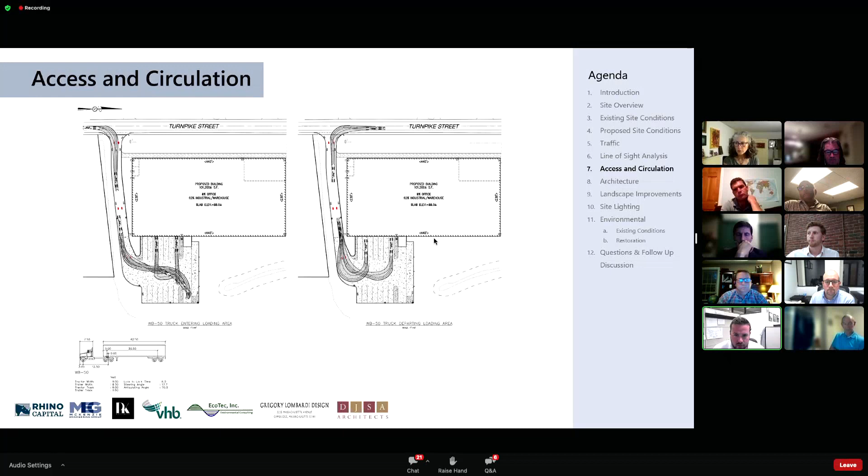So I guess that's it for the turning movements. And Zach Sylvia can speak a little bit about the building itself.

Good evening, board members. This is Zach Sylvia, architect at DJSA Architecture. To give you an overview of the building, looking at the perspective, this is the entrance corner to the office component of the project. You can see we have glazing along the lower level office front, as well as clerestory windows above. This is a concrete tilt-up construction. The highest panel is 40 feet above finished grade, finished slab.

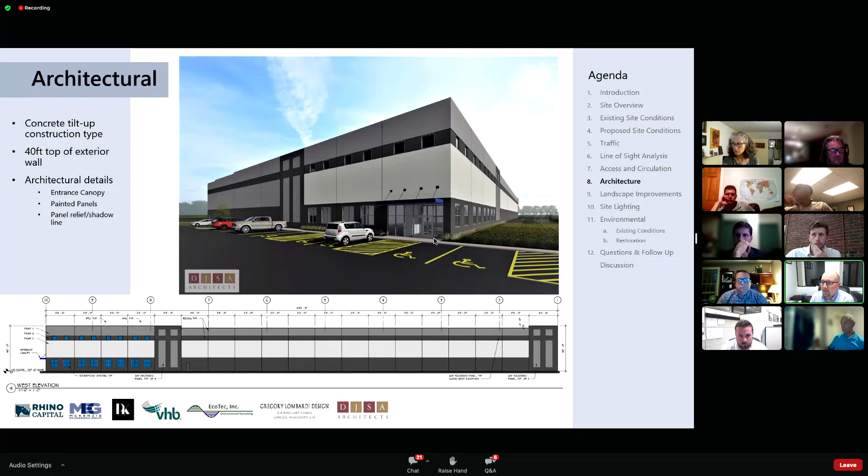Some of the highlights in the building: we have a tie-back canopy over the entrance, a 3-color paint scheme on the project, along with some reveals and relief panels to add some shadow lines in the building. An example of that is the horizontal band at the corner.

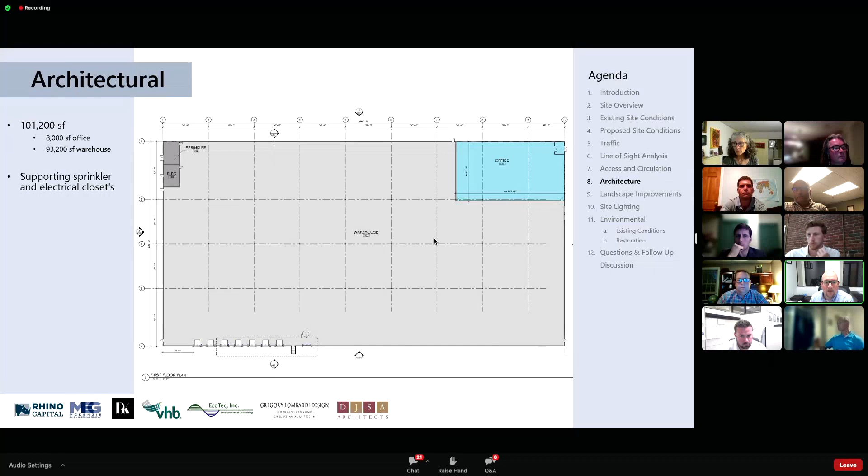Switching gears here, going back to some of the comments received both in the previous hearing as well as staff report comments. Just going to quickly fly over these. Our landscape architect, Bill Madden, who was on the call last week, unfortunately couldn't make it this week, but he did make some revisions to his plan.

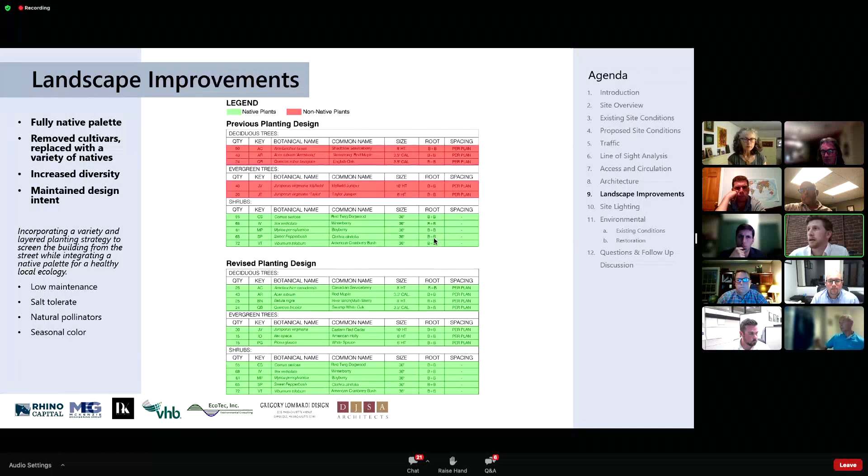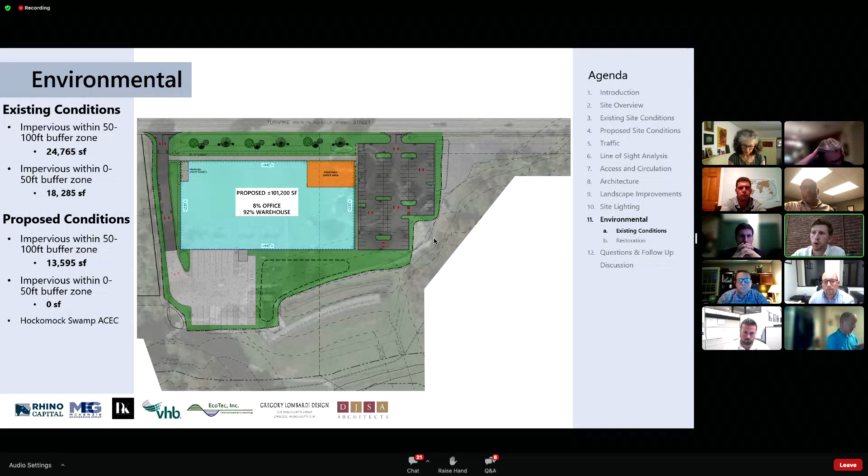We wanted to highlight, in closing, some of the overall environmental impacts as a result of this project. It's something we're really proud of as it relates to the overall intent and goal for this building. As it exists today, there's nearly 25,000 square feet of impervious area within the 100-foot buffer zone, and roughly 18,000 square feet within the 50-foot buffer zone. Our proposed project is intended to remove entirely all impervious area within the 50-foot buffer zone and reduce that 24,000 down to 13,500 square feet within the 100-foot buffer zone. So we feel what we're proposing is an overall reduction to environmental impacts as it relates to the work area.

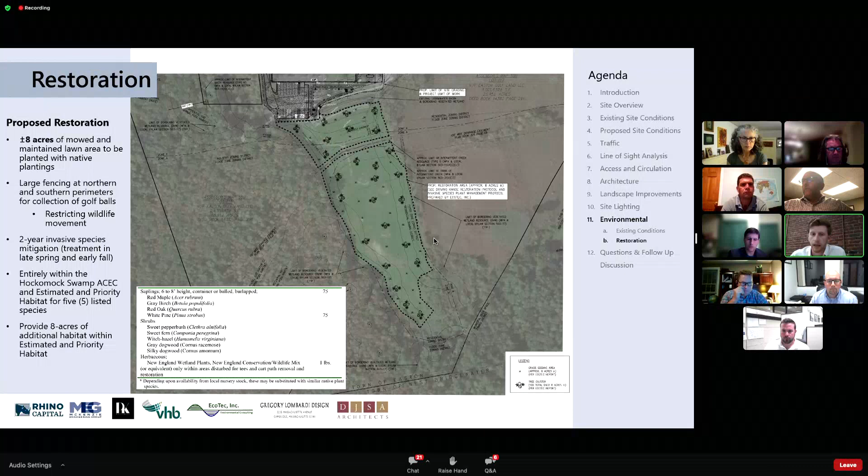We actually did receive a no-take letter from Natural Heritage, and we shared that letter with the Conservation Commission, and just got off a hearing with them. Really the only outstanding item relating to our Conservation Commission work is our stormwater peer review, which I understand is also something the Planning Board would like to see. Austin has responded to staff report comments but has held off fully submitting our revised site plan until we receive those stormwater peer review comments. We'll address those, incorporate them into our plan, and then resubmit a full, complete plan set reflecting those changes. We felt it redundant to go forth with another plan set that would just create more paperwork, so we wanted to wait until we got those comments - just wanted to highlight that so everyone's up to speed.

And with that, that wraps up what we had to talk about, and we're more than happy to answer any questions that might have come up this evening. Great, okay, well thank you - fantastic presentation. Board members, any questions or comments?

Is that a long night or an efficient presentation? I think it's the latter. But Stephanie, do you have anything to comment on? Nope, I think they've covered everything.

We're having a little difficulty getting quotes, but finally found someone who would respond to do the stormwater review, so we expect that to be on an expedited track now. Sounds like we're in good shape. We just need the peer review comments back, tweak it, and see if we continue this to 2 meetings out or see it sooner. If peer review hasn't started, we want to go 2 meetings out with the Concom, who put us out to...

25th it was. Yeah, July 25th. I think that's as stressful as it was bouncing in between Zoom hearings. I think that's probably the best.

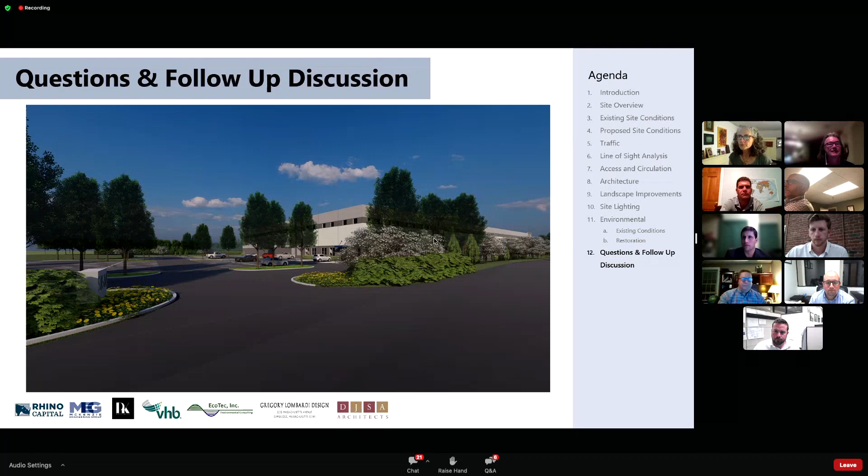All right, we have a motion. Any further discussion? Hearing none. All those in favor? Strange aye, Stetson aye, Sarah aye. All right, unanimous. Thank you, guys.

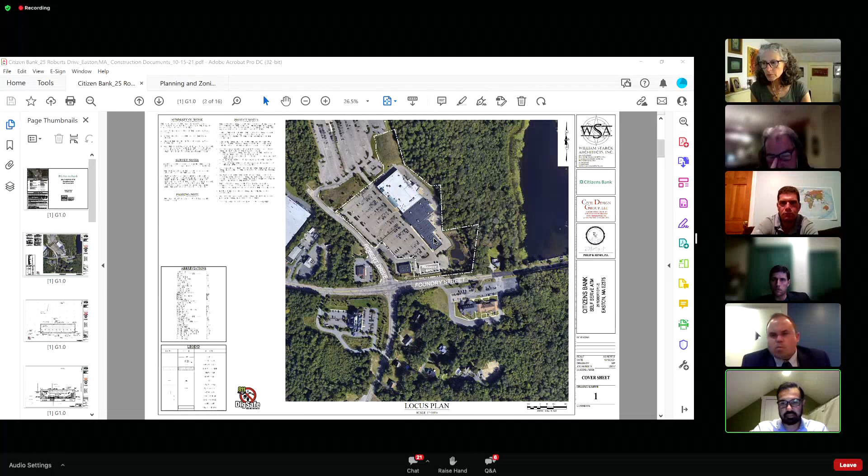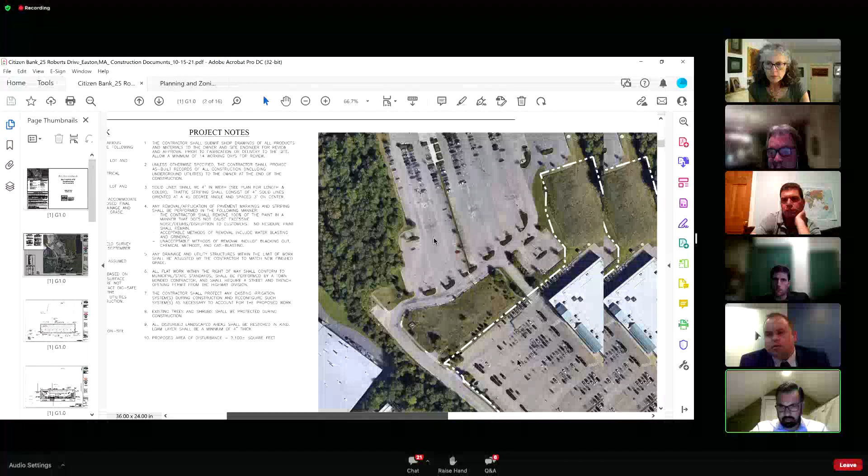As Christian had mentioned, we're proposing a drive-up ATM located on 25 Roberts Drive, parallel to Foundry Street and 106. The proposed area is within this 12.76 acre lot. It's away from the shopping center and adjacent to the existing building.

If the zoom works, apologies, that sits here now. The project itself is approximately 2,200 square feet, and it will eliminate 9 parking spaces in the overflow parking area. The project itself entails a concrete reinforced pad with power run up to the ATM, and then a freestanding canopy structure above the ATM to provide weather protection for patrons that drive up to the ATM.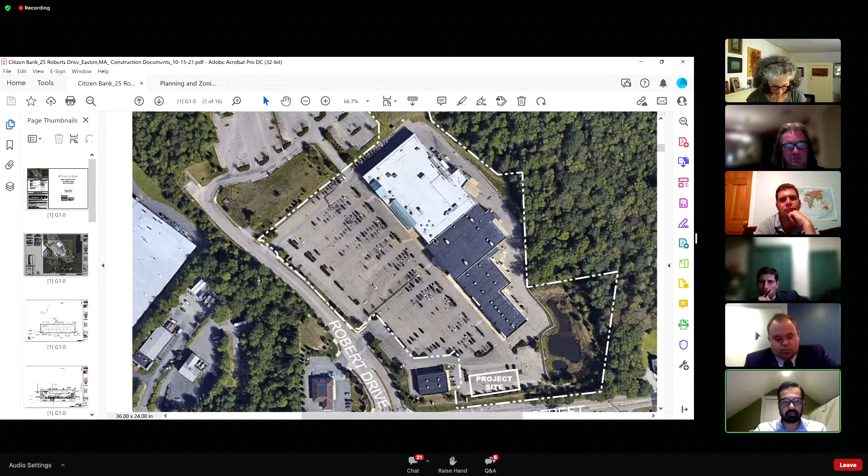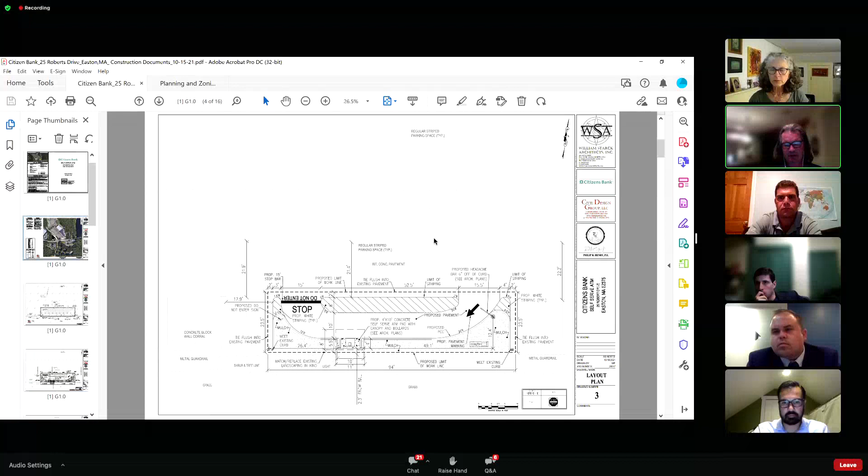Sure, thanks. So the question I have is, because this gets put in the overflow area, which is down there, but we already see the back of the building, dumpsters, and then they put in clothing donation boxes, which we all know what those end up looking like. It looks like the structure's tall enough here, so we're going to see the back of this from the street. Are you going to add any landscaping there, like a little bit of a buffer, so we don't have to keep seeing the back of everything?

Yeah, I totally understand that. That agreement's usually between the bank and the landlord on how they work out the actual landscaping along there on Foundry. Relative to our project and our project site, we do have the canopy - just the canopy. There's no overgrown shrubbery or landscape that we're proposing. It's just going to be a mulch bed, simple landscaping and low maintenance on that particular site.

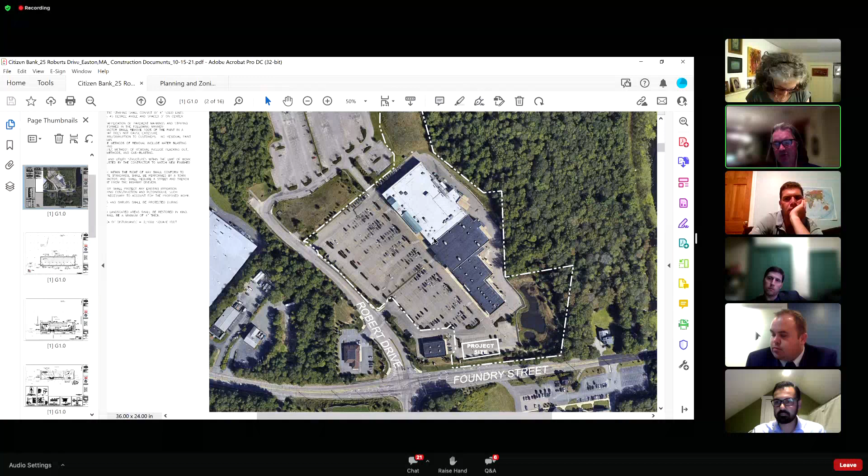Yeah, well, I'm just wondering, I don't know what the board members think, but we keep seeing the back of everything there, and I don't think you're looking for drive-up traffic from there, so couldn't we just add a few trees to block it, so we don't have to see the back of everything? Sure, we can. Just so something was put, because they already put some signs in they didn't come to us for. Stuff just starts getting added, and I understand what it looks like - they want to address it from their retail side, but I'd like to see it addressed. It doesn't have to address the street, but I'd rather not just see the back of it. It'd be nice to just erase it with a tree.

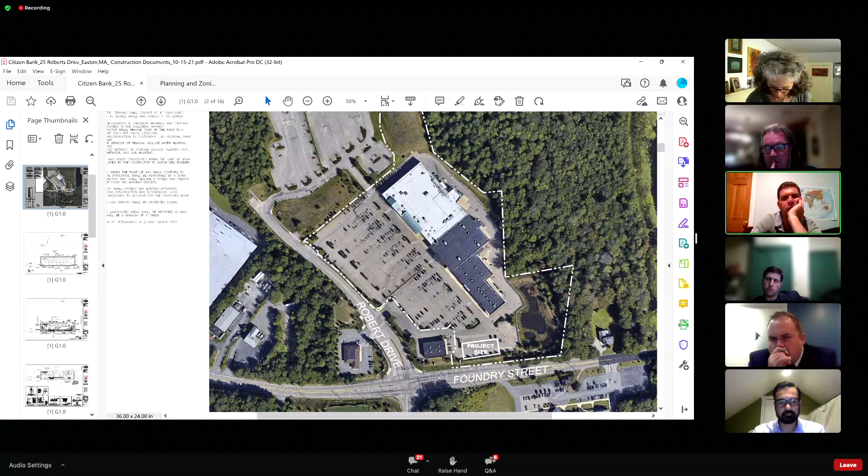What's the size of the structure? I'd like to add too that the structure is also going for a separate special use permit for signage as well, so that's being done by another vendor. But the height of the structure is approximately 11 feet 2 inches.

At the high part where you're under the ATM, and at the low side, it's approximately 10'4". It's 2 pylons on the side with an awning that covers the car and the patron when they're up at the ATM.

So are these internally illuminated? Is that what the special permit's going to be for the signage? That's correct, so that'll be coming here too. So the pylons on the side are going to light up, but the clearance height sign is not going to light up, correct? The pylons on the sides, and then under the canopy itself there's recessed LED lights. Right, and those lights as well.

I would like to point out that the sign vendor did mention the light would not disperse around the site, it's primarily just at the ATM. So there's no disruption, light pollution, or any cutoff to the site boundary. Well sure, I mean I'm not going to argue that a little screening would be helpful. Sure.

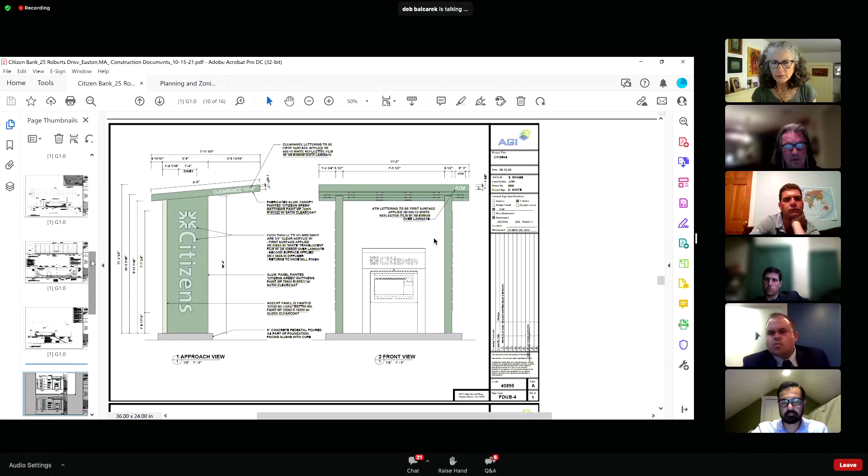Is there any pedestrian access to this? The primary access is by vehicle, but someone that walked up to the ATM could actually walk up and use it, but the primary function would be from a vehicle.

Also like to mention that there is no change or proposed change to any stormwater management for this as well.

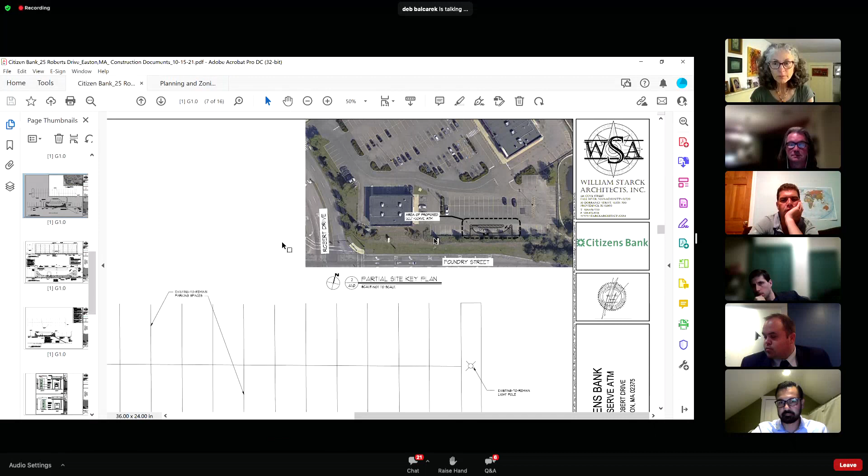Were there any other site considerations for placement, or was this the only location considered for this shopping center? There was one location we submitted previous to this. It was actually located here previously, but with concern about the amount of traffic through this main corridor and patrons exiting the ATM, the concern was that this would back up traffic or cause potential issues with patrons entering and exiting the plaza and the ATM. So it was asked if we could relocate the ATM to a different portion of the site that didn't interrupt or interfere with the main traffic entering and exiting the plaza.

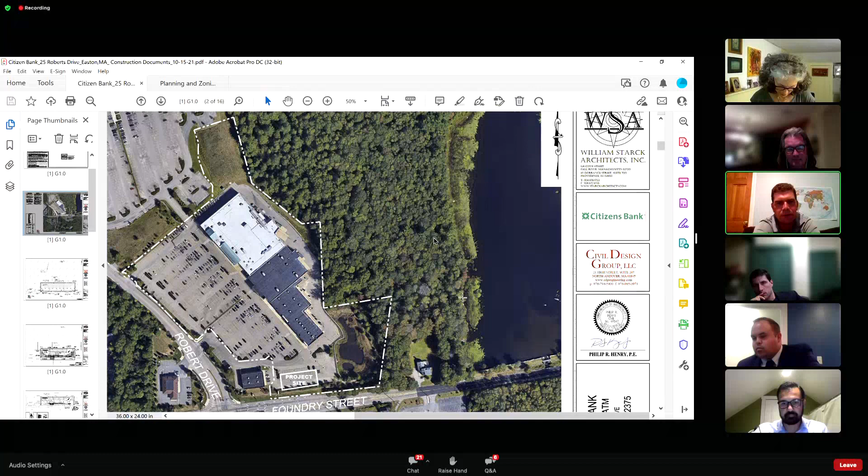Yeah, it's just the way that corner and the road is just kind of ended up. It's obviously not the ATM's fault, but it's just an odd part of that location.

Is there any other comments from the board? I definitely will revisit the tree or some type of landscape issue with both the citizens and the landlord. I'd like to not see this from the street because it's just the back of everything - I'm beating a dead horse, but it's just the back of the building next door, the insurance building. We see the back, we see the dumpster, we see the mechanicals, we see those donation boxes, and let's try to dress it up a little bit and stop giving all the ugly stuff to the people on the roads in Easton. So if we could just come back with a plan that has those added in - there's some existing conifers there anyway.

It seems like you just have to add 3 or 4 trees in between, block it out nicely, all even, like a tree at either end of those little island bump outs. Well, I'd like to see the whole ATM covered, because right now you just see the back of the ATM and the ventilation box.

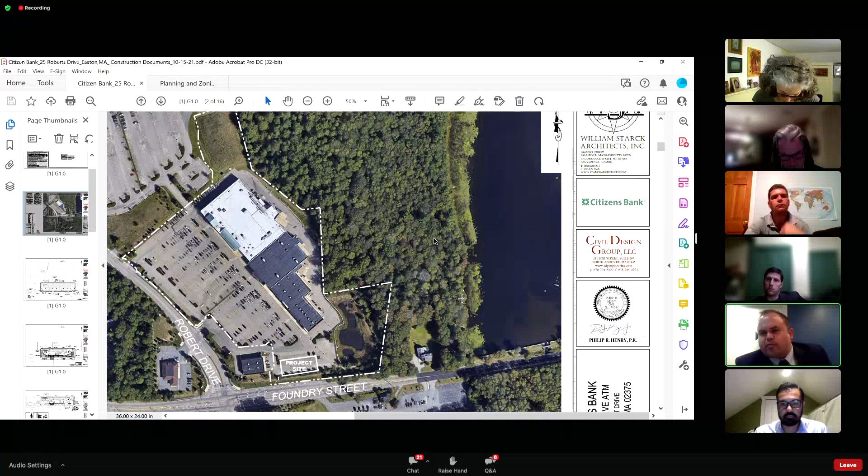I don't know if there's anything you'd like to hear from the product manager for Citizens. I think Mr. Pereira covered it pretty well, and hearing the board's concerns about the back of it from the roadway, I think that's something we should check with the owner of the property.

Would the board perhaps want to continue this while we work on it, as well as the special permit? Obviously it's going to have to come back to us with a special permit, so we could do a contingency rather than leave it hanging. Board, correct me if I'm wrong, but other than the concern I brought up, I think we're all okay with everything. So if you can just get some trees thrown on there, when you come back for the special permit we'll get you in and out.

All right. Terrific, thank you very much. Greatly appreciate it. Thanks for waiting.

Do we want to continue this out, or do we get rid of site plan review and it just goes forward? Do we still have to do site plan review along with a special permit, or do we just do a special permit?

What if we have it contingent upon the special permit, as well as some sort of arborvitae behind the ATM? No, deer — it's all deer around here. An arborvitae today is a Charlie Brown Christmas tree tomorrow. Okay, gotcha.

But you'll come up with something — you definitely want deer resistance. This is Easton, we have a lot of deer. Yeah, I think they're going to have to scrap the site plan review and just come back for the special permit when they file.

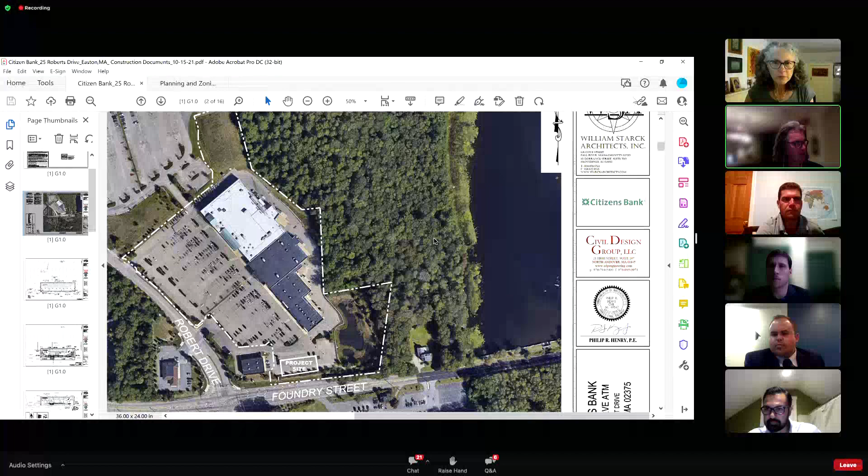So we have board reorganization, representative appointments to CPA and Capital Planning, and Economic Development — although they structure that differently — and meeting minutes.

I looked at them and they looked okay to me. Motion to approve, Stetson. Second, Shane. All those in favor, aye. Shane, aye. Stetson, aye. Balsaric, aye. Thank you, Deb, thank you all.

Board reorganization — so am I getting axed, or do I get to stay as chair? One more year, I say, before I quit.

And would you like to continue to be the, well, it's not vice chair, they call it something else. Oh yeah, I mean, I'll pass it on too if anyone else wants to do it. Just speak now.

I don't need to hold that. I heard you handled that really well. Share that, you did well, that was, oh my God. I don't know if the next one did too, because I was like, why? I thought I was the worst vice chair ever, this guy just keeps on talking, he won't stop. I got a note today that says I hope projects XYZ gets the same scrutiny as Aroma Joe's. Oh okay, right, yeah. I said, was that really scrutiny, or was that just pointing out missing items?